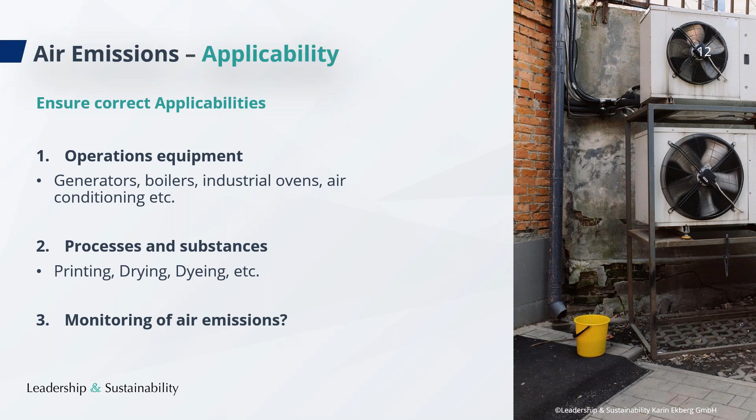The operations equipment includes generators, boilers, industrial ovens, air conditioning, and you will understand a bit later why we are dividing the different machineries and equipment accordingly. So you have the operations equipment, and then you have your processes and substances, like printing, drying, dyeing, etc. And then, of course, you will also be asked if you are monitoring your air emissions.

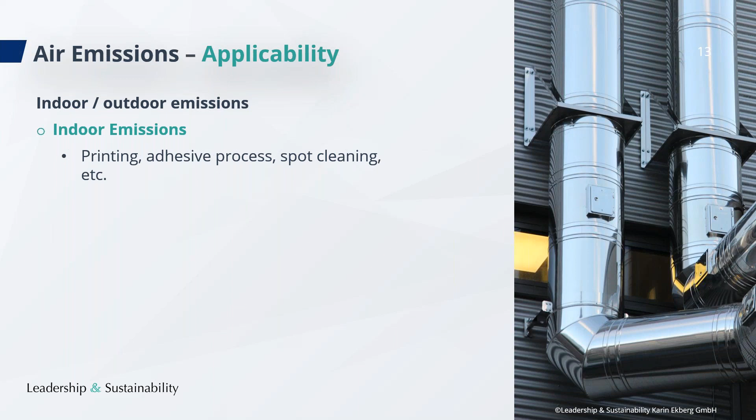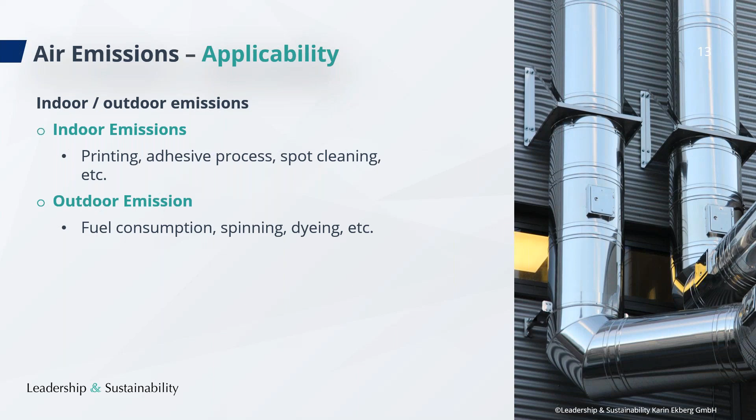And now we will differentiate between indoor and outdoor emissions. Indoor emissions most of the time come from printing, from adhesive processes, from spot cleaning, and such processes. Outdoor emissions usually come from fuel consumption, from spinning, dyeing, etc. This is where you have a pipe that takes care of the emissions from these processes and leads it into the outside, similarly to what you can see on this picture here.

Now here are some examples of different processes you might have, the source of the emissions, and what type of pollutants you might have. For example, energy production: you may have emissions from your boilers, and very often particulate matters, nitrous oxide, sulfur dioxide. The type of pollutants will differ depending on the energy source you are using. If using coal, you would probably have all of them. If using gas, you might not have particulate matters. So it really always depends on the type of the energy source that you have.

Then we have, for example, coating, drying, curing, where you might have emissions from high temperature ovens, such as volatile organic compounds. Sizing is another example where you have pollutants like nitrogen oxide, sulfur oxides, carbon monoxide, which is a very toxic gas. Bleaching, depending on which bleaching agents you are using, you might be using chlorine compounds, and then you might have chlorine or chlorine dioxide in your emission. Or from chemical storage, you may have emissions from storage tanks, for example volatile organic compounds.

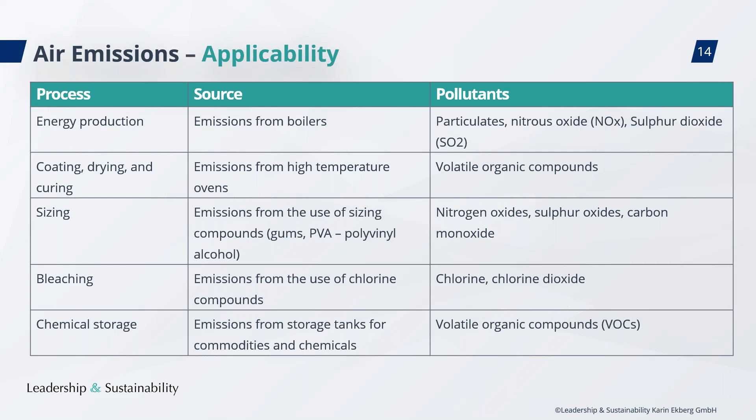So those are just a few examples of the type of pollutants that you might have, depending on the process that you have in your factory.

And now I want to give you an overview of all the questions in the air emission section. You see here level 1, 2, and 3. The air emission section is very special in that sense, because most questions are at level 1, so you have 5 questions there. At level 2, you have only 1 question. At level 3, you have only 1 question.

So what does this mean for us? At level 1, you can get a maximum of 25 points. At level 2, you can get 50 points. At level 3, you can get another 25 points. So here it is so important that you can manage all those questions at level 1 in order to be able to move on to levels 2 and 3 and respond to those questions, so that you can actually achieve more than 25 points.

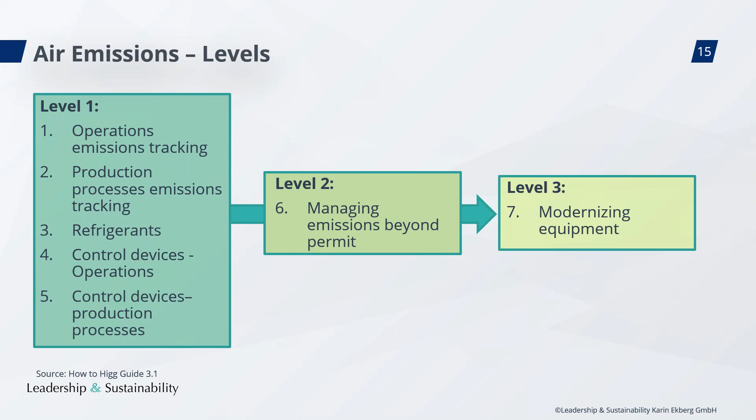Now let me give you more information about the first question. So the first question is, do you track your air emissions from operations? If you do, we are asking you to enter data for all your air emissions, and you should select all the pollutants that may be associated with your specific emission source. This question does not include production processes. The data you are asked for is the source, whether there are emissions from this source, whether you are tracking it, which pollutants you have, whether they are regulated by a permit, and if so, whether you are in compliance with this permit.

In order to understand your emission situation when it comes to air emissions, we really encourage you to develop an inventory of all your air emissions, all your machines and processes that produce air emissions, to put them into an inventory. I very seldom see this during verifications, but it would be so helpful, because very often we have long conversations about which type of emissions you have, which machines, etc. It's very difficult for the verifier to know exactly where you have the air emissions. Of course we walk through the factory, it is possible for us to see to some extent, but it is difficult for us to know exactly how the piping is structured in your factory. So an air emission inventory table could look like this. This is just an example, but what is important is that you have all the emission sources listed.

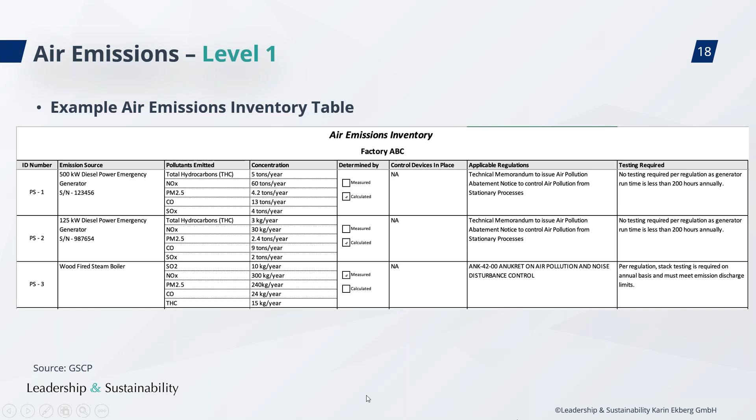And then we also have the production processes. So do you track your air emissions from production? You will again be asked the same questions as with question number one. The emissions from the production process are most of the time fugitive emissions, and the other emissions, for example from your operations, are often point source emissions that go out via a chimney.

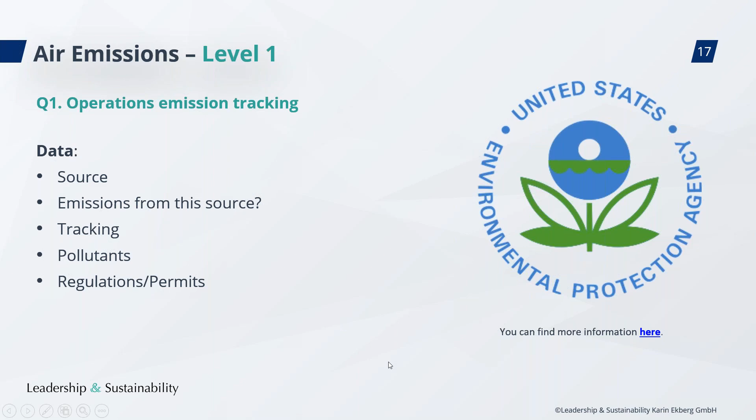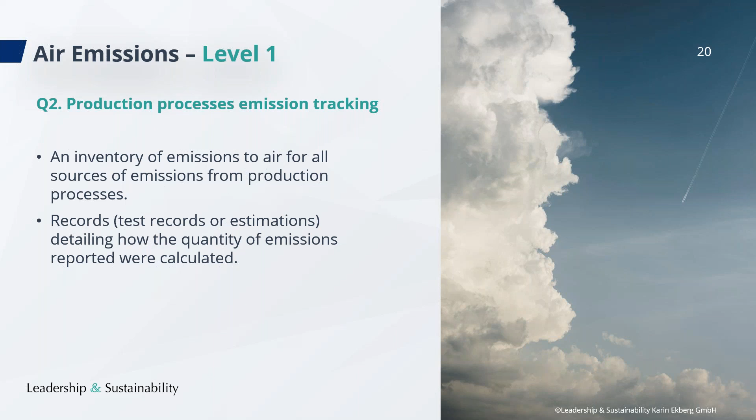All right, so then if you have an inventory, it would be great. You can upload it, of course, and then you should also have available any records and tests that you may have for your different pollutants, to prove that you are in compliance with the regulation.

All right, and then question number 3, refrigerants. Did your facility add additional refrigerants to any existing equipment during this reporting year? And then you will list the refrigerants, the quantity of the refrigerant added, the unit of measure, the tracking method, and the plan for fixing the leak.

And of course you may not have had a leak, and in that case you may not have needed to add any refrigerants, and then you can respond no here. But in every case where you have had a leak, where you have had to add refrigerants, then you need to respond with a yes here.

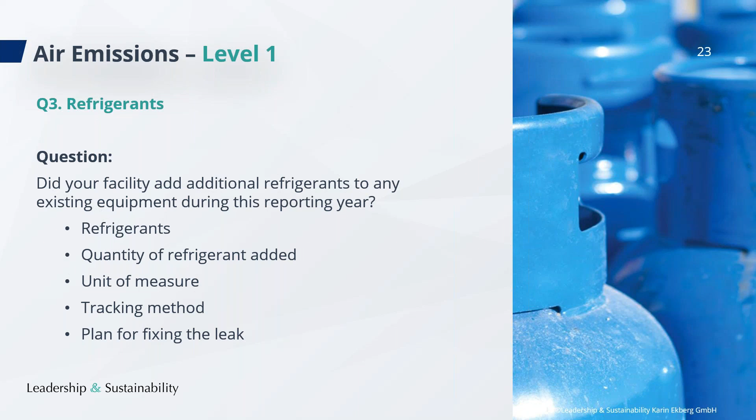And we also know that we have a global warming potential for those ozone depleting substances as well. So we can calculate because the problem is that you have carbon dioxide as a greenhouse gas emission, but those refrigerants are very strong. They have a higher potential for carbon emissions than what carbon dioxide itself has.

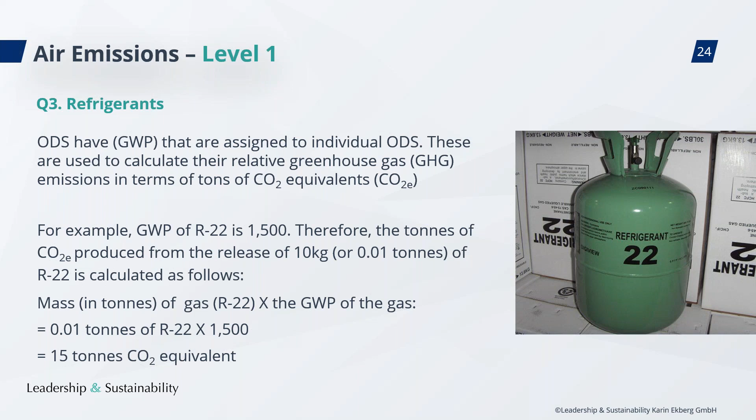So the global warming potential, for example, of R22 is 1,500. So if you have, for example, 10 kilograms of R22 being released, then you would calculate it as 0.01 tons, which is 10 kilograms, and multiply it by 1,500 because the global warming potential is 1,500. Then your result is 15 tons of carbon dioxide equivalent, meaning it's 15 times as much as 1 ton of CO2.

All right, and then you should also make an inventory here. I can only recommend, as we talked about when discussing data management, how important and good it is if you can have a complete inventory and store your calculations and inventories in one place. This is of course also the case here.

So you should also identify and comply with all applicable laws related to ozone depleting substances. And if you need to phase them out, perhaps they are not allowed to use anymore, or within a certain period of time they will not be allowed to use, then you should make sure that you can phase them out in time. And of course you also need to implement a regular maintenance program for ODS containing equipment. That is for sure something important to do.

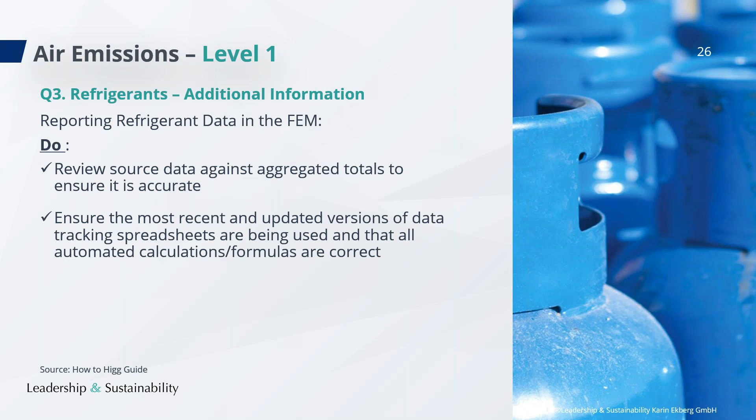And then when it comes to the refrigerants, you have probably seen with previous questions, and in some of our previous webinars as well, that there is additional guidance from SAC and from Sumerra about how to report data. So here we would like you to review source data against aggregated totals to ensure accuracy, to ensure that the most recent and updated versions of data tracking spreadsheets are being used, that all automated calculations are correct, and then ensure the proper units are reported and review any assumptions.

So make this test, ask yourself: does this make sense? Does this number really make sense to me? Is it actually relevant for my business, or may there be a calculation error in the numbers I give?

And I have a question here. If I want to calculate the VOC emitted from spot remover used in a facility, where can I get the information from the SDS? Yes, you should be able to find information in the SDS about the concentration of the VOC. And if you know the concentration of the VOC in your spot remover, and you know how much of the spot remover you are using, then you should be able to calculate the VOC emitted.

And then we have here another question. Should we also consider the refrigerant we added because we bought a new air conditioner, not because of a leak? If we're going to think about it, then what should we write down as the plan for the leak? No, I don't think you should respond with yes here if you have bought a new air conditioner. This is a new machine that you have in your factory, yes, but you don't have a leak. And here in question 3, we are interested in the leaks.

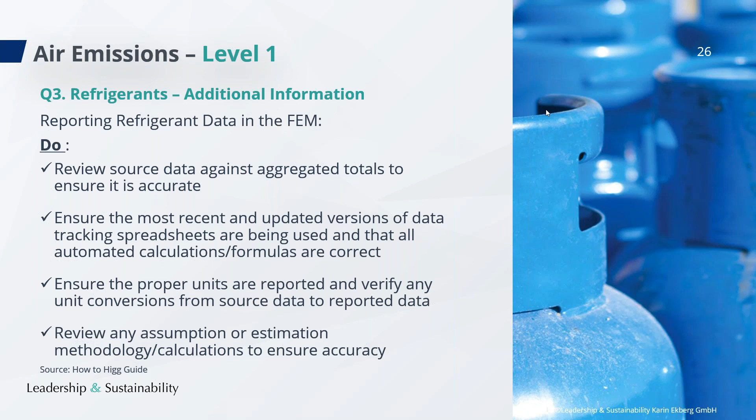Good, thank you for those questions. And then also regarding the data reporting for the refrigerants, do not report data that is not accurate. So which means, of course, you wouldn't do that anyway, but this means you need to make sure that the data you are reporting is really accurate. And then do not report estimated data if it's not supported by verifiable and reasonably accurate estimation. So please make a clear estimation. And even if you do it, you might also write down for yourself, why did I estimate this number, or why did I do this estimation, and how did I do it?

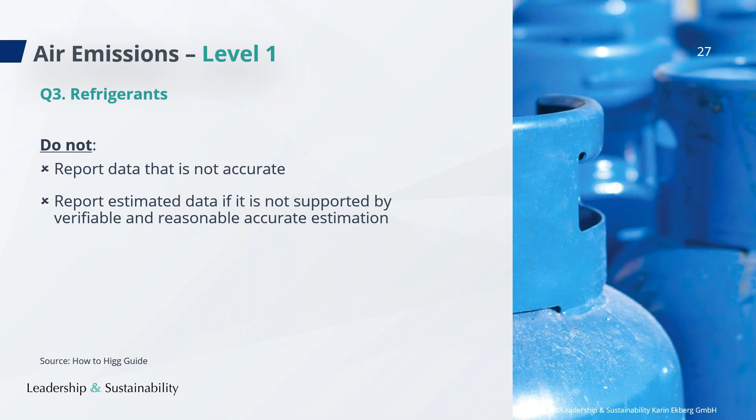And then the verification, and this is of course guidance for us verifiers. We should actually also be looking at the initial data collection processes and the data sources, the process and tools used to aggregate the data. And then if we see any errors or if we detect any errors together with you during the verification, we should correct that information and then of course make a comment in the verification data field, as with every response that we revise during the verification.

So I hope that is clear, and I hope that you take care and maintain your refrigerant devices and air conditioning devices, etc., in a good way so that you don't have any leaks.

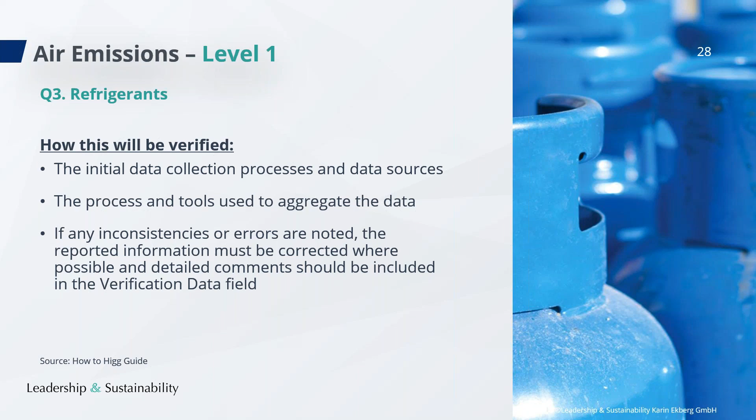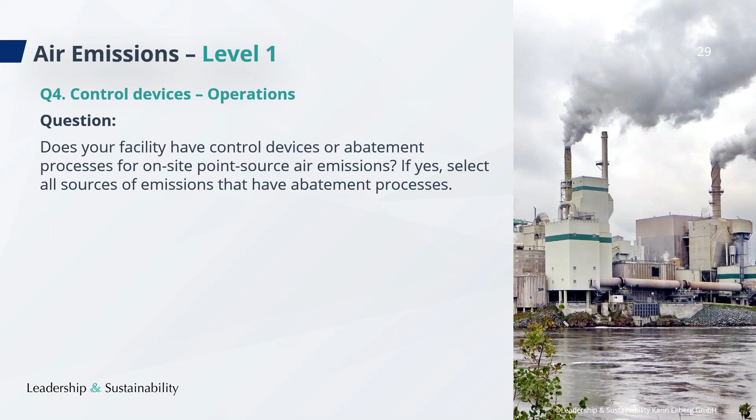And then regarding the control devices. And here the question is, does your facility have control devices or abatement processes for on-site point source air emissions? If yes, select all sources of emissions that have abatement processes. So here we are looking at, for example, the fuel, the boilers. So everything that has like a stack, you can see on the picture here, everything that emits to the outdoor via a stack.

And this is what is meant with an on-site point source air emission. And then you should indicate the source, the control device, the frequency of monitoring, and we also have here the definition of a point source air emission. So it says airflow which is controlled in some way and released into the atmosphere from a single source, such as a stack.

And I see we have one question here, so let me see. In level 1 question, do you track emission from your operations? The sources are from stack, vent, and air conditioning. I already track emission from boiler stack, but can you explain how we track emission from vent and air conditioning? Yes, this is sometimes a bit confusing actually, because if you have a boiler, you will receive also in the pre-populated table both a stack and a vent question.

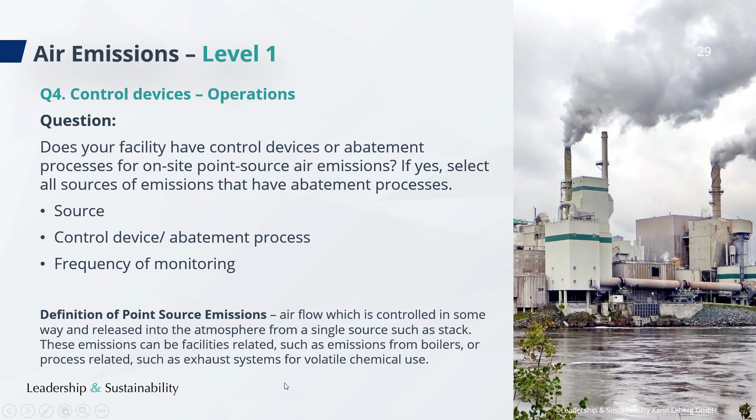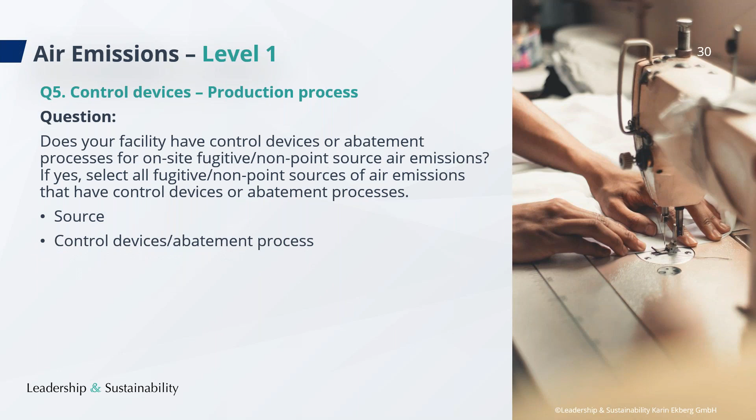Again, a similar identical table will be pre-populated for you, where you can include your source, the control devices, the abatement process, frequency of monitoring, and here we also have the definition of non-point source or air or fugitive emissions. This is really important, and that is something SAC did for the module 2020 - they divided between the operating processes and the production processes.

Let us see, we have one more question here: how to calculate VOC in the production floor? Well, first of all, currently the Higg FEM is not asking you to report any numbers for your emissions anymore. Since the Higg FEM 2020, that question was removed, the actual calculations.

But of course, for your own purposes, you do need to calculate. So how do you calculate the VOC in the production floor? Well, similarly to what we said about the spot remover, you need to know which chemicals you're using that have VOCs in them. And then you need to know which portion is the VOC - is it 30% VOC, and which one in my specific chemical that I'm using. And then of course you need to know how much of this chemical you are using. Then you will know, in a certain period of time, what is my emission of VOC in that period.

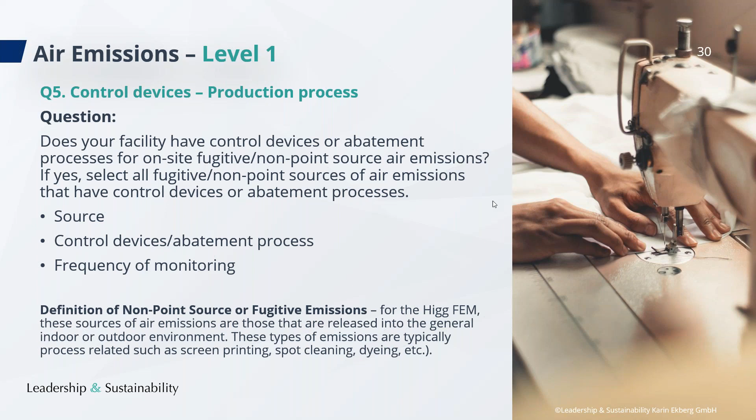Then if you want to calculate or estimate the concentrations, you would need to know the volume of the room, and you would also need to know what type of airflow you have in your room. So if you have air ventilation, for example, you would need to know how much air you are letting flow through your room in a certain time period. So there are several steps in this calculation.

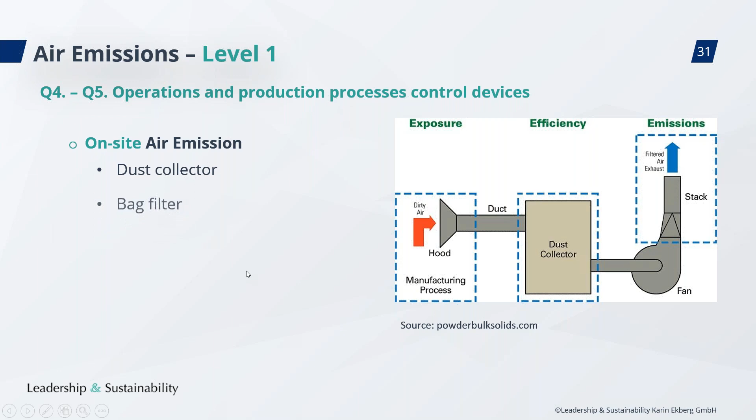And you may have a bag filter, you may have wet scrubbers, and for indoor air quality, you may have a fume hood. In this case, you actually had a combination of a fume hood and a dust collector. And you may have solvent recovery, and you may have also a local exhaust ventilation. So there are many different options that you might have.

And of course, the type of control device you need depends on the type of emission you have. So, for example, wet scrubbers can take care of dust, and perhaps to some extent solvents as well - it depends. For solvents, you may need something else, perhaps a filter with activated carbon, for example. So it really depends on the type of emission and the pollutants that you have in your airflow.

And I see that we have one more question here. Okay, that was just a thank you. All right, thank you, good.

And now those were questions 4 and 5, and with that we have gone through all questions at level 1. I know that this section, the air emission section, is quite challenging for some factories, especially if you don't have very significant air emissions - it might be difficult because perhaps you don't have all those control devices, so you are not able to respond yes or partial yes to all of those questions, questions 1 to 5, for all types of air emissions that you have.

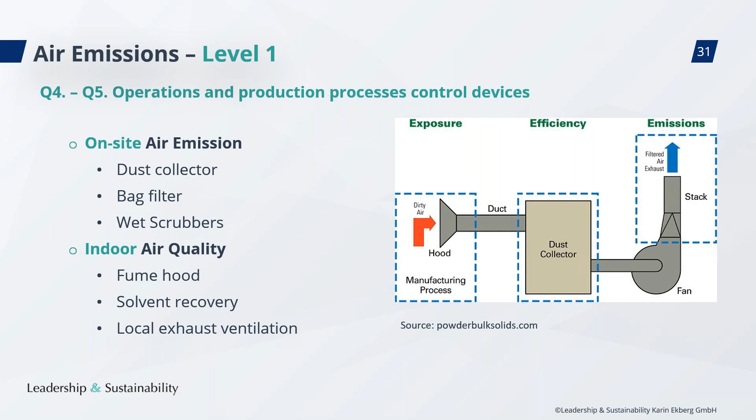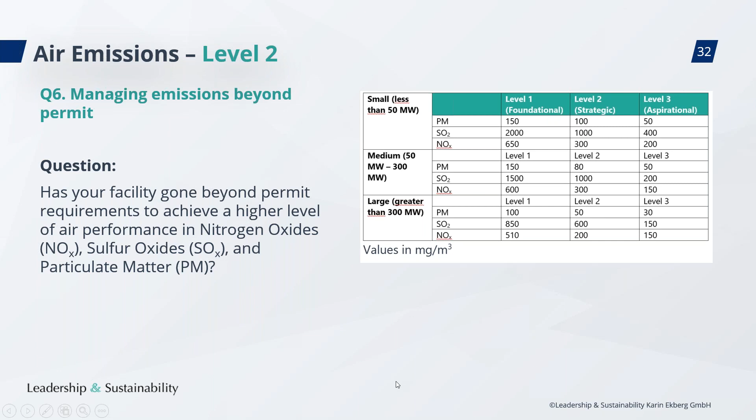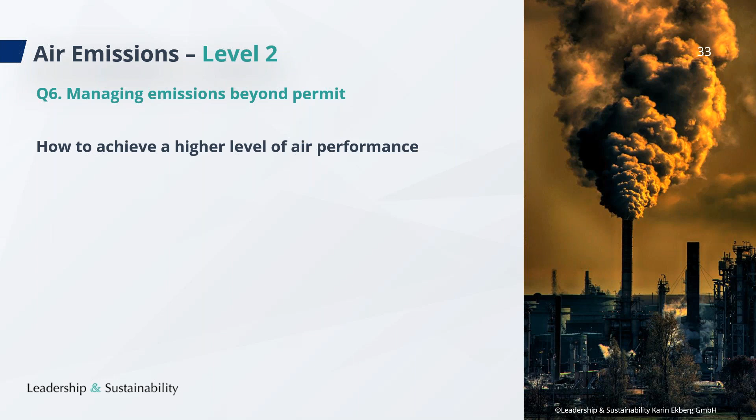Let me give you a few more examples. Beyond using other installations, you can use a cleaner energy resource like natural gas or renewable energy, and have an air pollution control system as we looked at previously. You can also use a management approach, for example by improving the efficiency of converting fuel to electricity, or removal of sulfur from the coal before combustion. If you choose another type of coal with a lower level of sulfur, your sulfur oxide emissions will also be reduced.

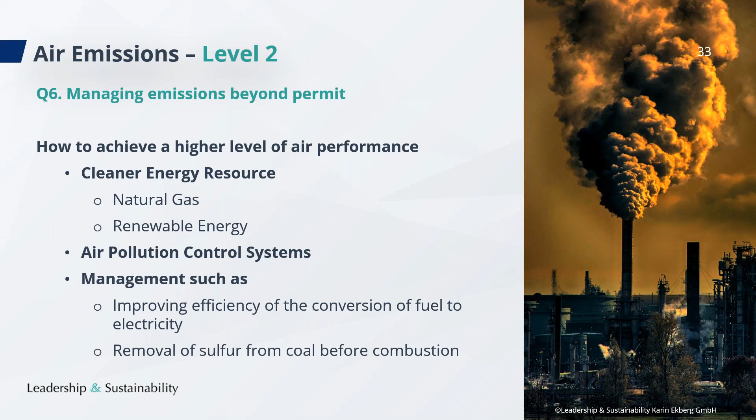For sulfur dioxide, you can have flue gas desulfurization, for example with dry or wet scrubbing. For NOx emissions, you can have flue gas treatment like a catalytic filter. For particulate emissions, you can have a chimney, electrostatic precipitator, fabric filters, cyclones or multicyclones, or wet particulate scrubbers. There are lots of different options, depending on the type of emission and the pollutants in your emissions.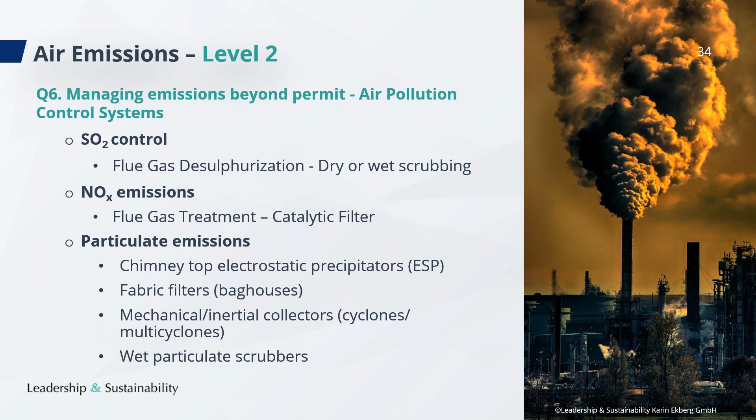Now I come to the example I wanted to talk about previously. Let's do a small exercise. Here we have a screenshot from the small boiler, with PM, SO2, and NOx, and the three different levels. Now I'll give you some information: the facility's emission results are particulate matter at 75 milligrams per cubic meter, sulfur oxide at 1,200 milligrams per cubic meter, and NOx at 250 milligrams per cubic meter.

Now my question to you is, which level did the facility achieve? If you would like to send the response in the question box, I would be curious to see what you say about this situation.

Okay, I get a few different responses. Actually, most of you respond correctly. And we got one very specific response, that it is level 1 due to SO2. That's perfect, that's correct. So it is level 1.

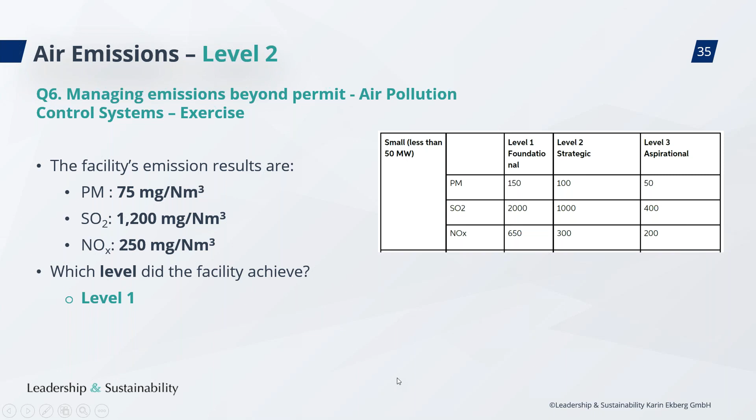Well done. Now the next question, and this is the last question, already level 3: Do you have a process for implementing modernized equipment to reduce or eliminate air emissions and indoor quality issues at your facility? This question is, for some facilities, really challenging, because in cases where you have very minor air emissions, it might not be realistic or defendable to have a big process here to implement modernized equipment. But if you can think of something you can do to improve your air emissions, that would be really helpful for this question.

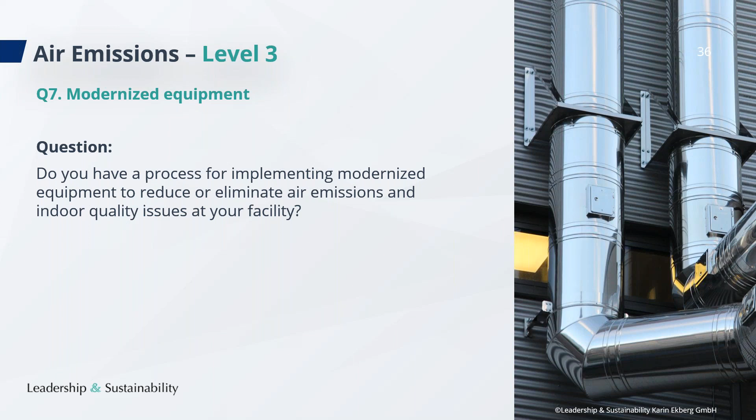So here you can, for example, replace equipment. You can substitute ODS with more environmentally friendly refrigerants. You can use cleaner fuel. You can also modify existing equipment, and you can optimize your abatement equipment. You can, in general, reduce your emissions.

And here it needs also to be a very specific plan, so during verification we would really like to see your documentation about this as well. Please make sure that you have a really robust plan that we can verify as verifiers.

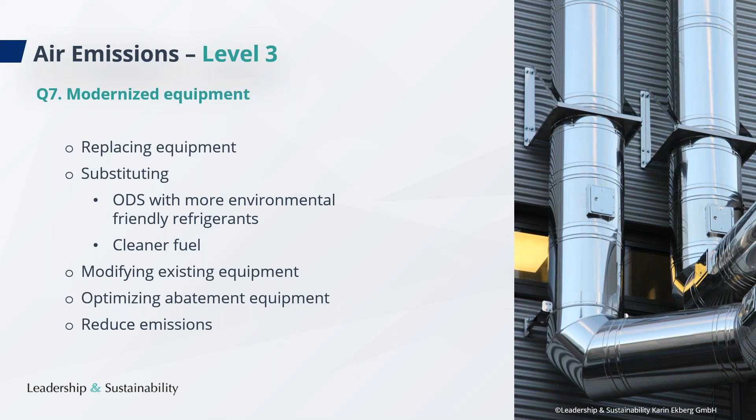So this was actually the last question, but I think I would like to give you a demo here. Let me just go to the Higg FEM, and here we go. We are now in the Higg FEM in the air emission section. As you know, there is always an introduction section, and I hope you can read this. I will make it a bit larger so it's easier for you to read.

So as always, there is an introduction section here, and you can see again what we talked about: the difference between the facility operations and the production processes. The facility operations is where you have point source emissions via a stack, for example. And the production processes is where you often have fugitive emissions, so to say, inside the building. But of course, we saw that on one of the pictures.

Sometimes perhaps you have a fume hood, so you are using VOCs, and then you have a fume hood that extracts the air and also sucks in the VOCs, and then perhaps you have a stack to the outside. So in this case, you would have a stack as well. And then an overview of what the Higg air emission section asks you to do.

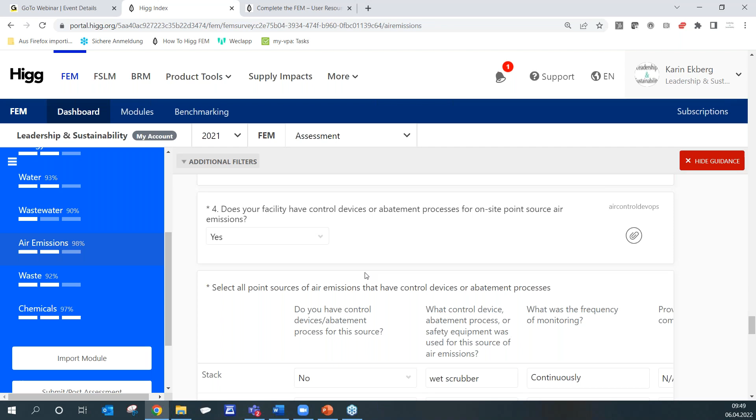And now we come to question number 4. Does your facility have control devices or abatement processes for on-site point source air emissions? Again, we get the pre-populated table, and then you have to respond here. Do you have control devices? Yes or no. So you respond yes or no to each and every question here.

And then you have question number 5 for on-site fugitive non-point source air emissions. This table again, of course, is pre-populated. In this case, we have responded that we have adsorption with activated carbon in all cases. And then what was the frequency of the monitoring? We are free to add any additional comments if we want or not. With the responses that we currently have here, we are able to move on to levels 2 and 3. So I hope that explains a bit also what it looks like. And I cannot stress enough how important it is that you complete those tables comprehensively.

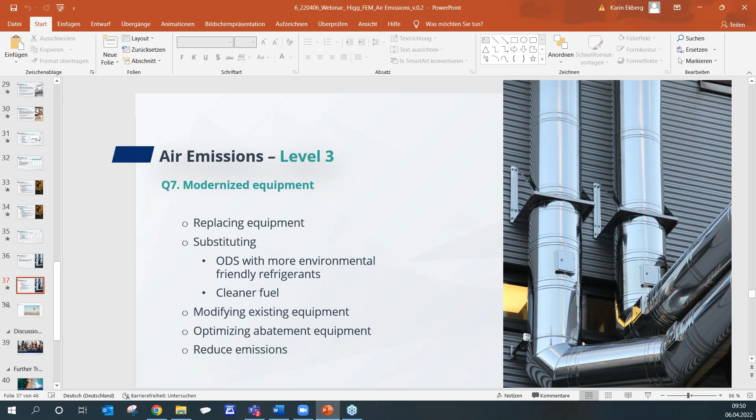All right, so back to our presentation. And here now we have come to our final slides for today. Do you have any additional questions for me?